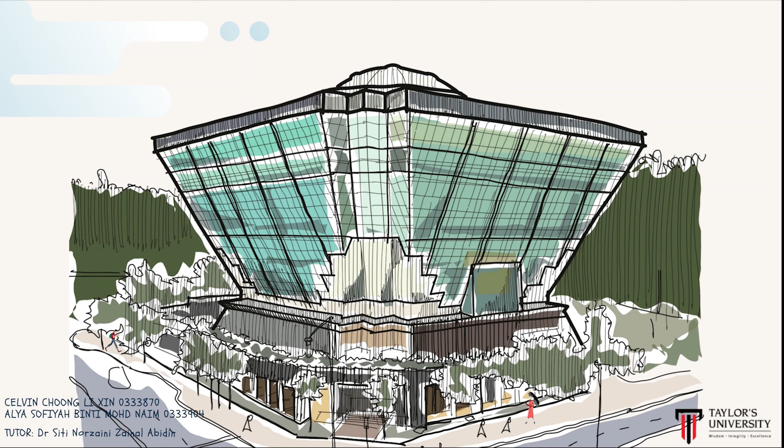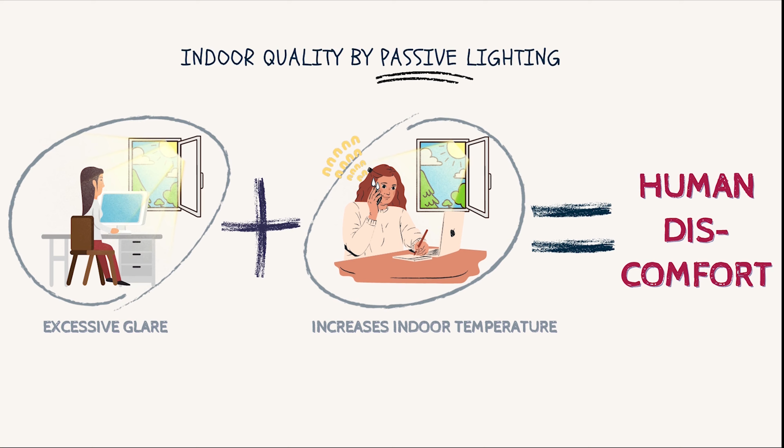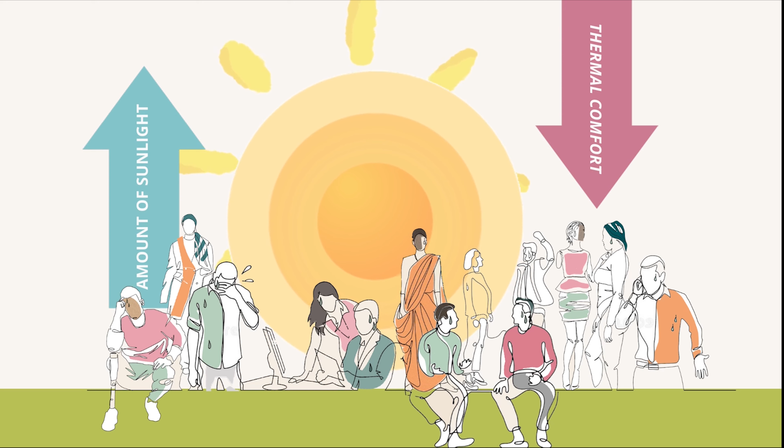In hot and humid climates, it is challenging to energy efficiently maintain human thermal comfort at an acceptable level. Improper placement of windows causes excessive exposure to sunlight, increasing indoor temperature that leads to human discomfort. However, the fundamental problem with solely relying on passive lighting systems is increased heat gain that causes discomfort for daily use. Hence, energy efficiency in office buildings often faces the phenomenon where the higher the amount of sunlight penetrating into the building, the lower the human thermal comfort.

Diamond Building is a shining example of using daylight as an energy efficiency strategy. It was built as the third government energy efficient building that serves as a role model for all office buildings in Malaysia. The art of green architecture combined with the science of energy conservation is showcased in the 4,928 square meters and iconic 8-story office building in Putrajaya.

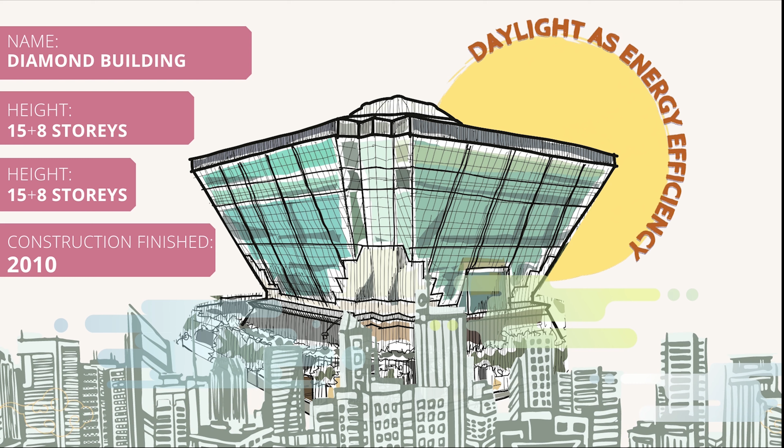The Energy Commission's Diamond Building was named the most energy-efficient building at the ASEAN Energy Awards, representing a 65% energy reduction compared to a typical office building in Malaysia. Besides, Diamond Building is the first office building in Malaysia to obtain the Green Building Index Platinum rating and the Singapore's Green Mark Platinum rating.

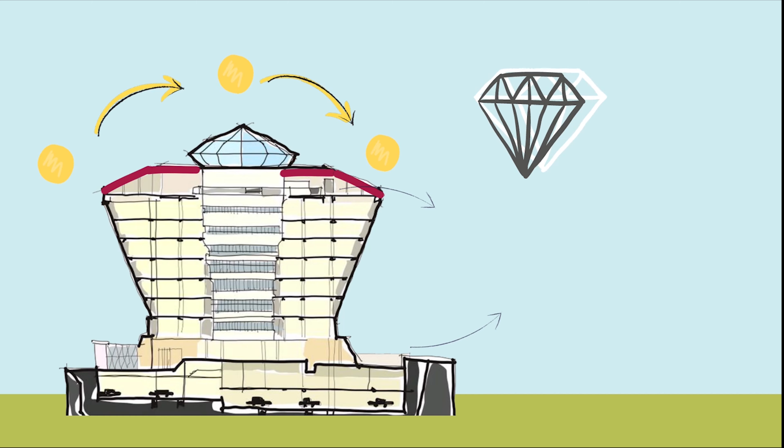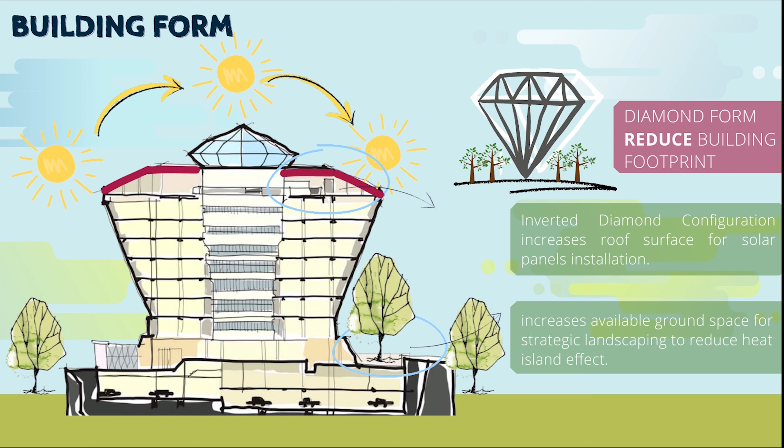Climate and the solar path help shape the building's diamond form. This inverted diamond configuration successfully reduces building footprint and increases roof surface for solar panel installation. The form also increases available ground space for strategic landscaping to reduce the heat island effect in urban areas. Diamond Building is oriented in accordance with the solar path, minimizing the areas impacted by direct sunlight, resulting in a total of 41% of solar impact reduced.

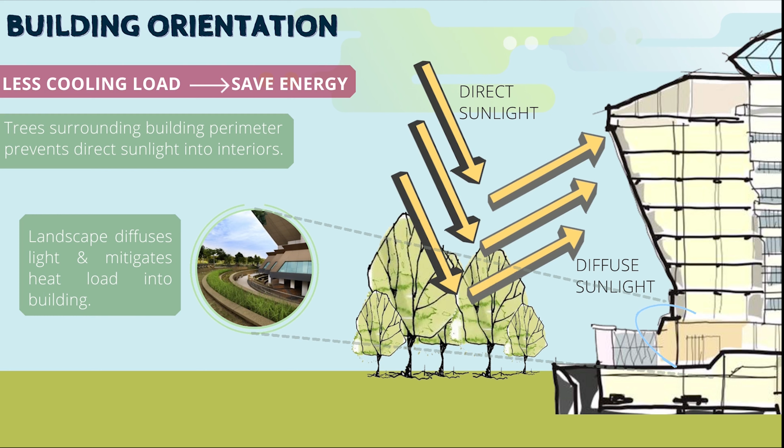In the structure diagram, it shows the orientation of Diamond Building allows north-south facades to be fully shaded, hence it maximizes solar efficiency. Trees surrounding the building perimeter prevent direct sunlight into the building. Landscape diffuses sunlight and mitigates heat load into the building, ultimately reducing cooling load which then saves energy consumption.

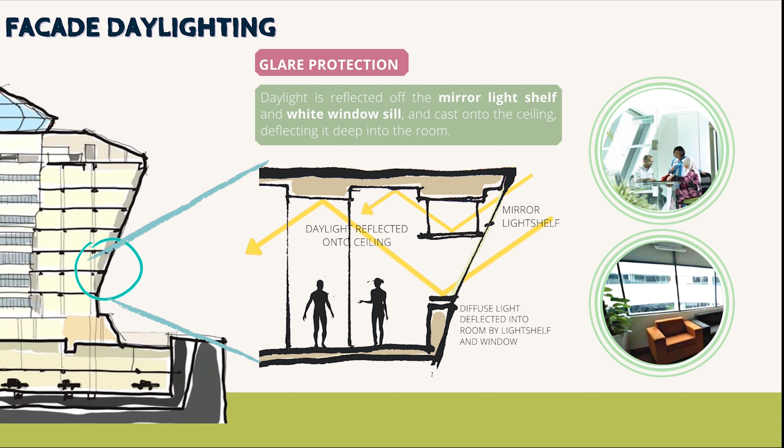Diamond Building utilized facade daylighting as an energy efficiency strategy. Daylight is reflected off the mirror light shelf and windowsills and cast onto the ceiling, deflecting it deep into the room till 5 meters from the facade and 2 additional meters from the corridor spaces. This design, along with the fixed blinds, helps prevent glare.

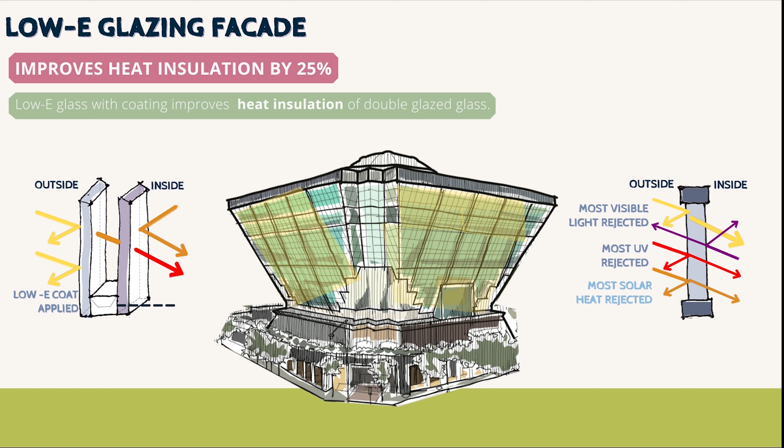Low E glazing used in Diamond Building's facade is specially treated with coating on the surface that improves 25% performance of double glazed glass. Diagrams showing the effect of low E glazing in the facade show most visible light, UV rays and solar heat are rejected by the facade while most warmth is retained in the interior spaces to achieve thermal comfort for users.

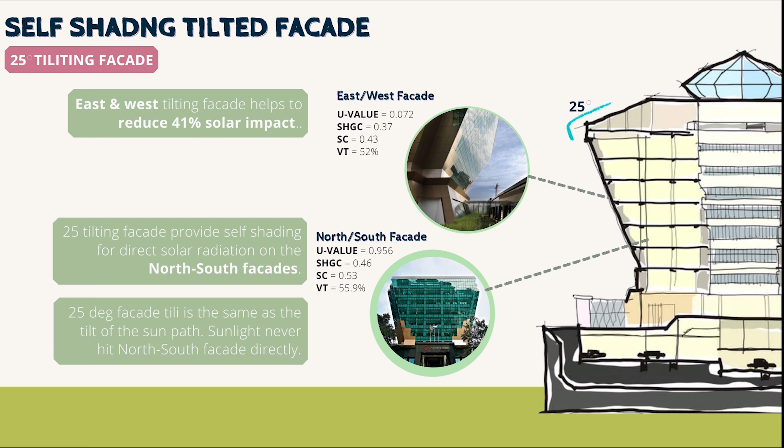Solar studies showed that 25-degree tilting facades would provide self-shading on the facades. East-west tilting facade helped to reduce 41% of solar impact, while north-south facade is the same as the tilt of the sun path. Hence, sunlight never hits the north-south facade directly.

The Diamond Building is designed to be at least 50% daylit, without glare, and with minimal heat entry. The clear dome forms the central atrium and is designed for the optimization of daylight. The central atrium alone provides 50% of natural light needed to illuminate the building.

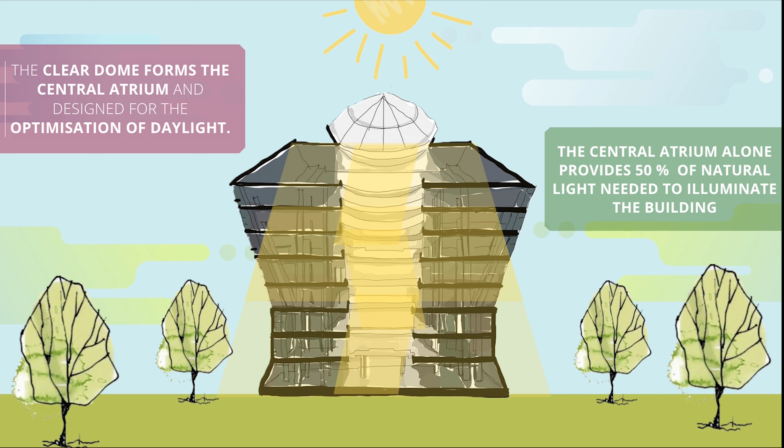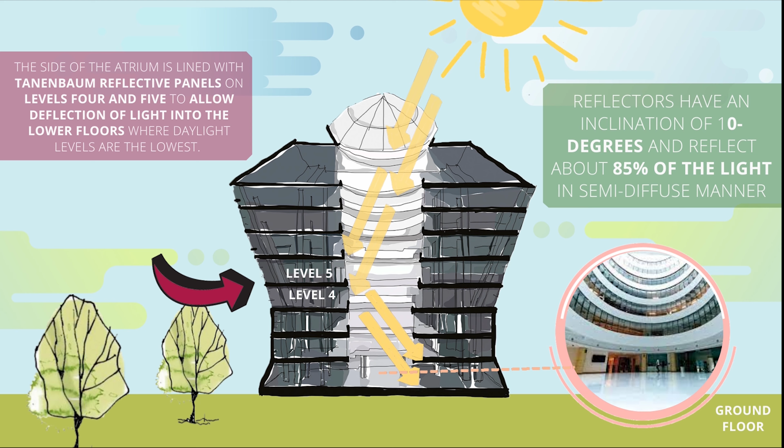Daylight availability decreases deeper into the atrium. For the upper floors, windows are replaced with white walls to reflect light deeper down the atrium. The side of the atrium is lined with Tanenbaum reflective panels on levels 4 and 5 to allow deflection of light into the lower floors, where daylight levels are the lowest.

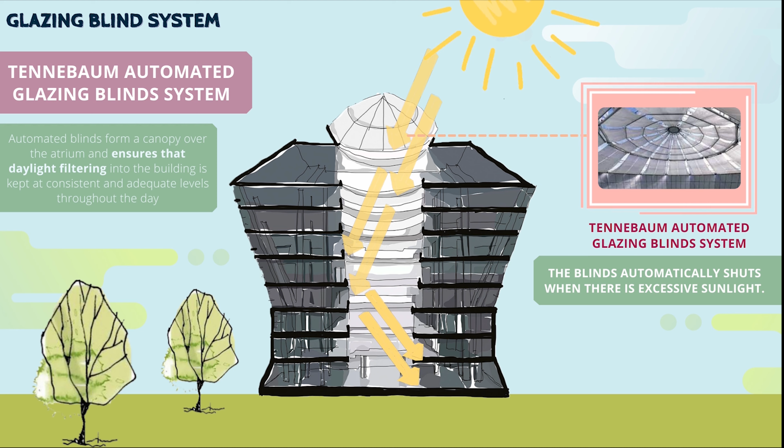Tennebaum automated glazing blind system consists of automated blinds that form a canopy over the atrium and ensure that daylighting filtering into the building is kept at consistent and adequate levels throughout the day. Furthermore, the blinds automatically shut when there is excessive sunlight in order to save energy consumption.

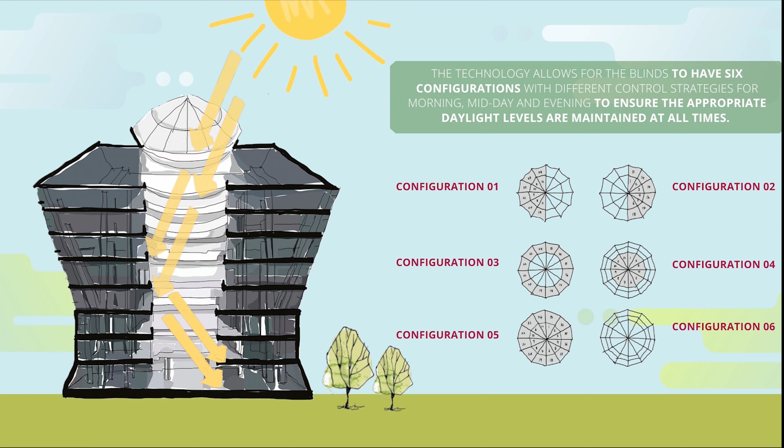An automated roller blind controls lighting in the atrium. The automated atrium glazing roller blinds consist of 24 individual blinds that can form 6 configurations, helping prevent direct sun while still illuminating the space. The blinds allow 30% of the light through to ensure daylighting for the offices facing the atrium even when the atrium blinds are fully engaged.

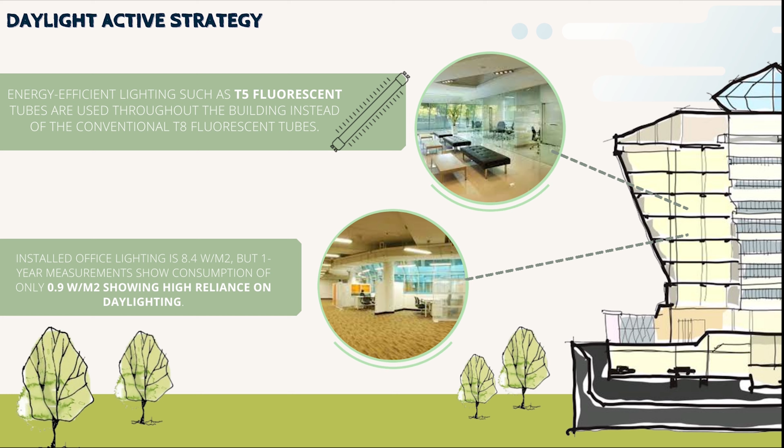Energy efficiency lighting such as T5 fluorescent tube with electronic ballast and LED lights are used throughout the building. 1-year measurements of installed office lighting have a consumption of only 0.9 watt per meter square, showing high reliance on daylighting. Daylight responsive lighting control is utilized to maximize daylighting. Integration with daylight sensors enables the artificial lighting to be switched off when daylight is adequate, resulting in energy savings.

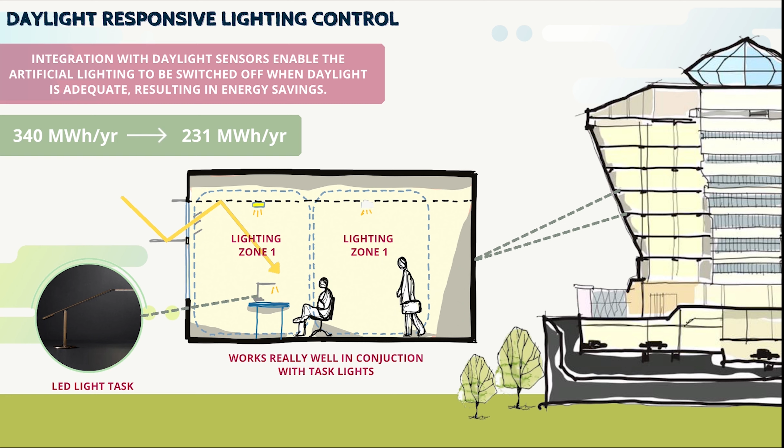The use of daylight helps to further reduce the total lighting energy from 340 to 231 megawatt-hours per year, representing an additional 32% reduction from the base building. Integration with the daylight sensors enables the artificial lighting to be switched off when daylight is adequate, resulting in energy savings. Individual workstations are also equipped with task lights to further allow occupants to control the lighting.

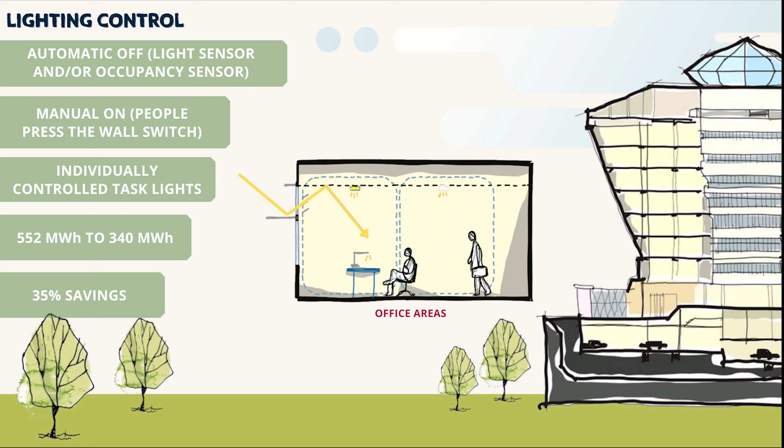Occupancy sensors are installed where lighting is zoned so it can be limited to areas needing it. The total lighting energy is reduced substantially from 552 to 340 megawatt-hours, up to 35% of savings.

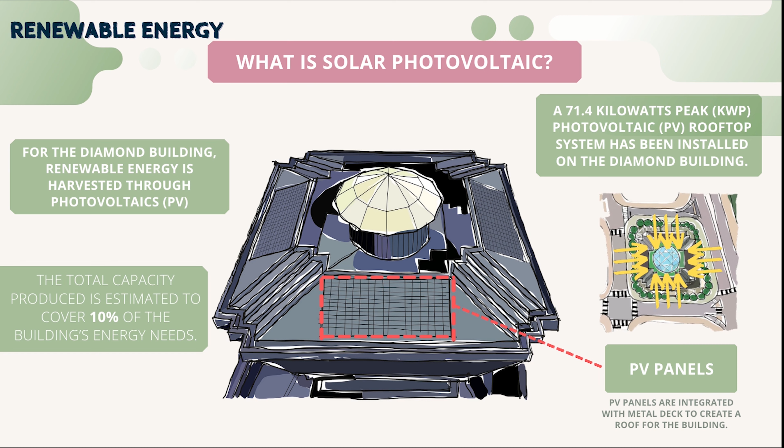For the Diamond Building, renewable energy is harvested through photovoltaics. The panels have a total installed capacity of 71.4 kilowatt peak, estimated to cover 10% of the building's energy needs. The panels have generated a monthly average of 8,300 kilowatt-hours and 100,000 kilowatt-hours annually, which provides cost savings on electricity charges.

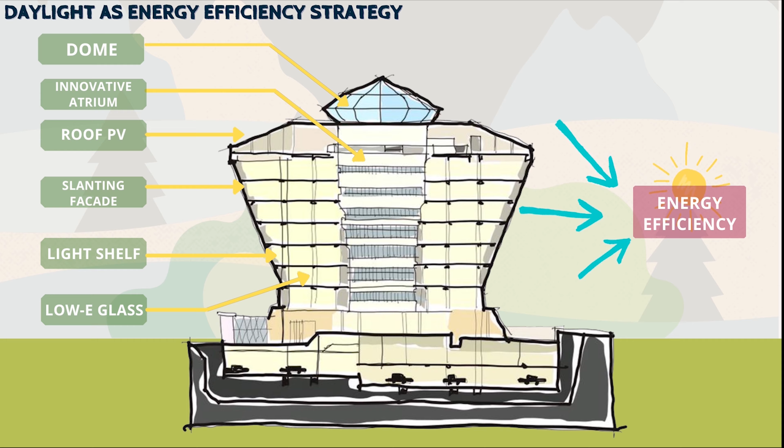In conclusion, Diamond Building has implemented many design strategies such as dome lighting, innovative atrium, photovoltaic panels, slanting facade, light shelves, and low E-glass to achieve energy efficiency. The Diamond Building represents a new approach toward climate-responsive building design in Malaysia.

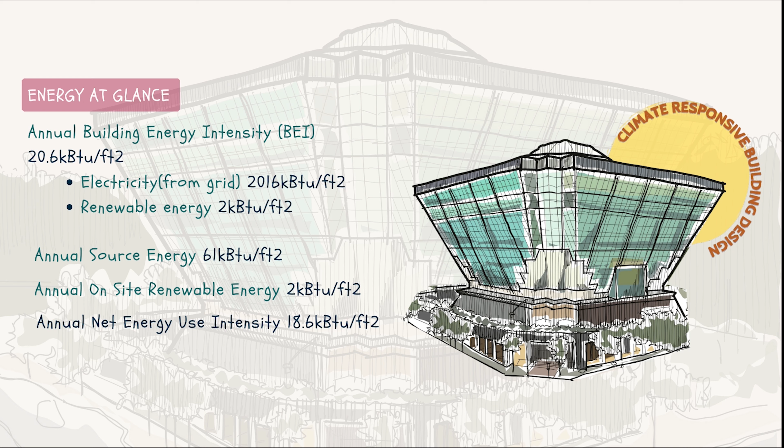Energy savings is 4 times better than typical office buildings, demonstrating the environmental and financial benefits of utilizing daylight as an energy efficiency strategy. The Diamond Building is a shining example of energy efficiency, taking the lead in developing and implementing solutions for environmental sustainability and showcasing the best practices in environmental solutions.